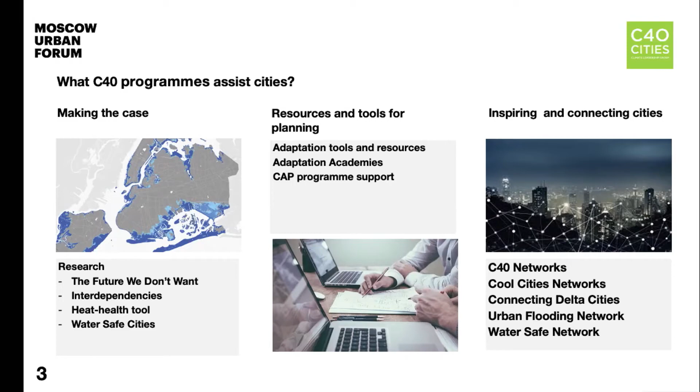We also looked not just at individual risks, but in our interdependencies report, we looked at how risks might combine, and cities would be facing interdependent cascading impacts from climate change. We produced recently a tool around how cities can avoid health impacts from extreme heat. And we're also looking at the impact of flooding and drought in terms of what are the social and economic costs. So all of these things provide cities with the data and the evidence that they need to understand and make the case for climate action.

We produced and developed a whole load of resources and tools for helping cities to plan adaptation action. So just to mention a couple of these, the heat health tool I've already talked about, and particular guidance we produced around monitoring, evaluating and reporting so that cities can understand the progress of adaptation and the impact that that's having. And we've also set up adaptation academies and a climate action planning program to provide support tailored to city needs on action planning, on implementing and mainstreaming, and on monitoring and evaluating.

And finally, one of the key things that we do at C40, it's sort of the beating heart of our organization, is connecting cities so that they can talk to each other, they can share problems, and they can share, importantly, solutions. So you can see here on the right a number of networks.

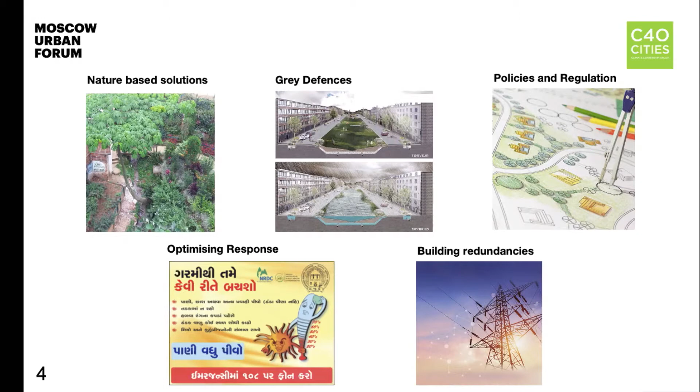So thinking about nature-based solutions, things like green space and tree planting, rain gardens and river restoration. And to give an example, Medellin's Green Corridor program is looking at designating areas across Medellin to increase green space and tree cover, reducing the temperature, providing shade, and reducing health risks from extreme heat.

In terms of grey defences, this is things like cool pavements, seawalls and floodgates. A great example is Copenhagen and their cloudburst street planning strategy, putting in a range of sustainable drainage systems across the city.

Thinking about policies and regulation, this is things like land use zoning and building codes. An example here from Cape Town of their coastal management lines, which have been introduced to prohibit or restrict the construction or maintenance of structures seaward of the line.

And thinking about optimizing responses, so building awareness through heat campaigns and warning systems, for example. We can look at the city of Paris that's designed and developed an interactive cooling center map, so citizens can locate emergency centers when they need to.

And finally, thinking about building in redundancy, so making sure that cities have backup supplies. And an example here is from New York. During Hurricane Sandy, their hospitals were operating on backup generators. So just making sure you've got the capacity to keep the city running.

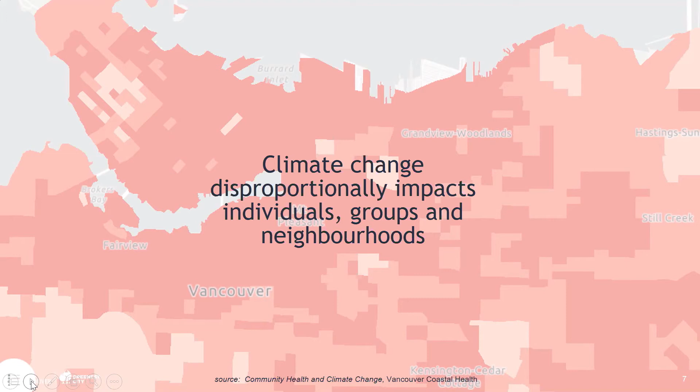And when those changes happen in our community, they disproportionately impact people and groups and particular neighborhoods. Largely, it's the disadvantaged neighborhoods. But it's impacting all neighborhoods, but differently in different neighborhoods, depending on the amount of trees that they might have and the other environmental conditions in those particular communities. So it's not the same across our city.

So in 2012, we adopted our adaptation strategy, and that mapped out hundreds of initiatives that we would undertake to be more prepared as a community. And in 2018, we updated that action plan. As you can see on the pillars of some of our bridges, we're indicating what the sea level rise will look like in our own city to educate our residents about that. So I'd like to tell you about our 2018 plan.

In terms of the hazards that we're planning for, poor air quality, I told you a moment ago, we were seeing that go up. Heat waves, more extreme heat in the summers. We're expecting increased coastal and urban flooding. And so we expect the sea level rise and extreme storms to impact the coast, but also then a lot of rain to come and impact the urban flooding as well. And then, of course, more extreme events.

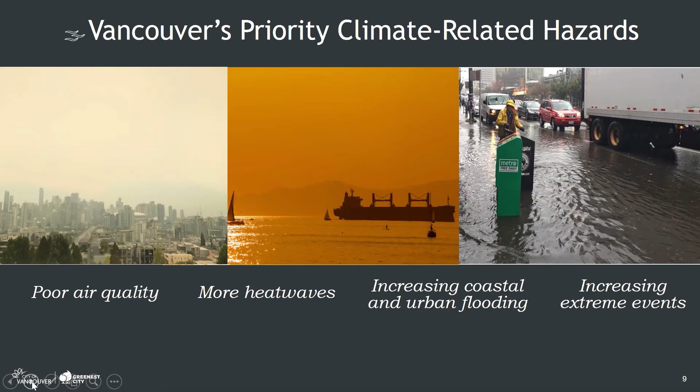As a city manager, there's lots of emergencies we have all of the time. We're always adapting to various things, but this is one of those that we see coming, and we need to be preparing for it. So our plan maps out our roadmap for doing that.

And then develop action plans and think about the co-benefits. How can we improve the quality of life, the health, the reduction of carbon emissions? And then number 5 is implement it. And then 6 is to monitor how we're doing in those actions. And then of course go about updating our plan like we did in 2018.

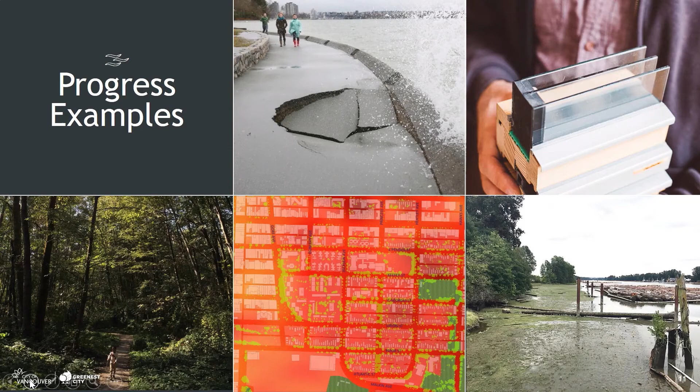Now, green infrastructure, you heard about Copenhagen has been doing great work on, and Rachel talked about other cities. This is just one example. If we have to rebuild a street, let's rebuild the street to adapt to climate change. Let's not just build the same street we've always been building. So this is an example of one project. It's a very small one, 1.2 kilometers.

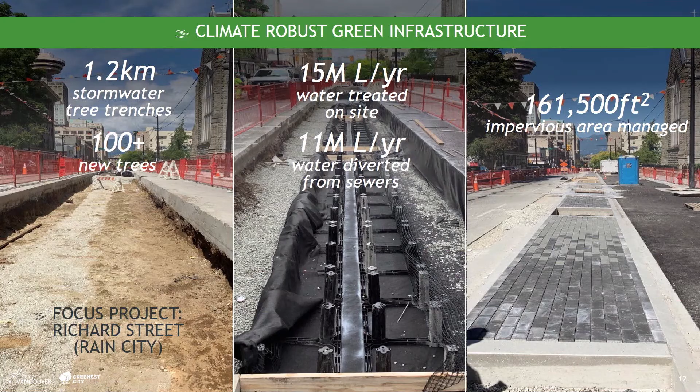Our buildings, of course, need to be adapted as well. Energy efficiency, like you heard about in Moscow, is a very, very important step. We're also looking at the rooftops. How can our rooftops absorb the stormwater and help to cool the city? So green roofs are a very, very important part of the strategy.

If you look around at the bird's eye view of any city, rooftops are very prevalent. So absorbing stormwater and keeping the city cool with green roofs is a very important opportunity for us. And of course, you can grow food up there as well, and you can create natural habitat.

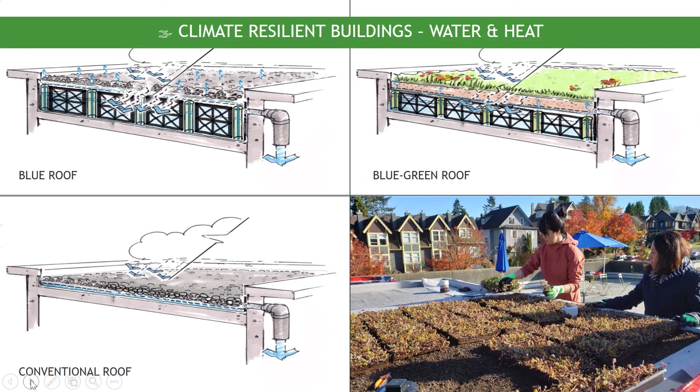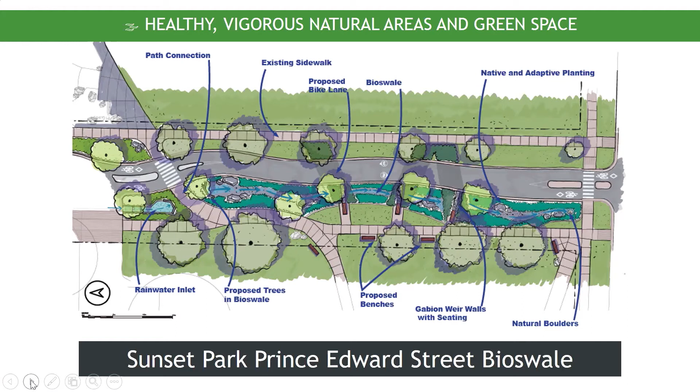So bioswales absorb the stormwater, create natural habitat. They also filter the rainwater, the runoff from the streets before it goes into the ocean. Now we're engaging our residents in this work as well. This is a citizen heat mapping process. The hottest day of the year, we give residents heat detecting equipment, and they ride around the city, and we can track and monitor heat across the entire city. So engaging our residents in this work is very, very important. They learn about it, they communicate with their neighbors.

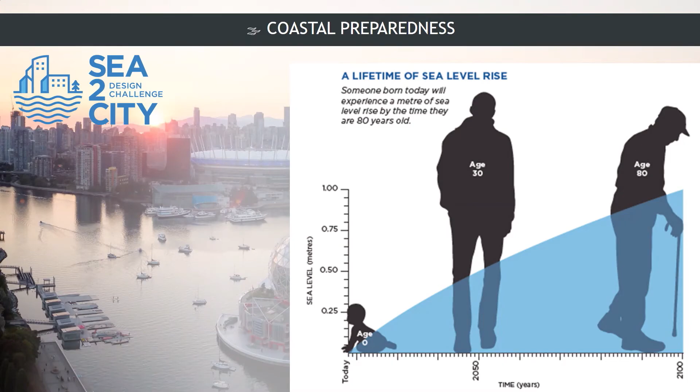Now, as I close out here, I've highlighted a number of the different areas, but what I'd like to say is that the layering of those together, thinking about the city holistically, taking an equity lens to understand how particularly low-income people are impacted, more vulnerable people are impacted, but thinking about this from a multi-hazard approach. How do these things layer together? How does one thing impact so many other things?

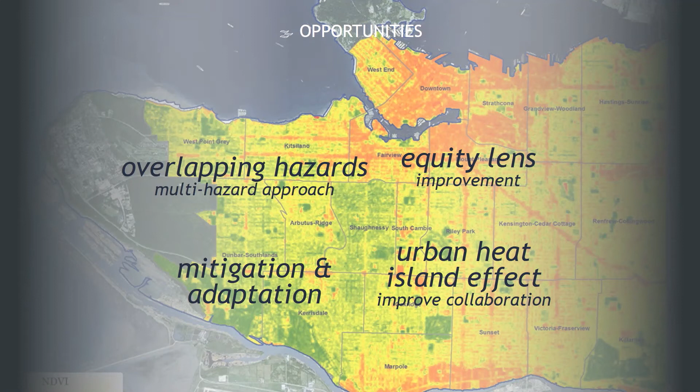How do we understand urban heat island effect? So the hottest parts of the city with those that are most vulnerable with where we plant trees. And in this map, you can see the areas with the trees are the coolest, the areas without the trees are the hottest, and those also happen to be the areas where we have the most low-income people. So understanding and mapping all of these layers is very important, not just looking at one thing at a time. So this work in our cities is absolutely critical.

We are members of C40, as I mentioned. If you don't know about it, look it up. There's incredible resources. We get to work with our peers across the world in making our cities even better.

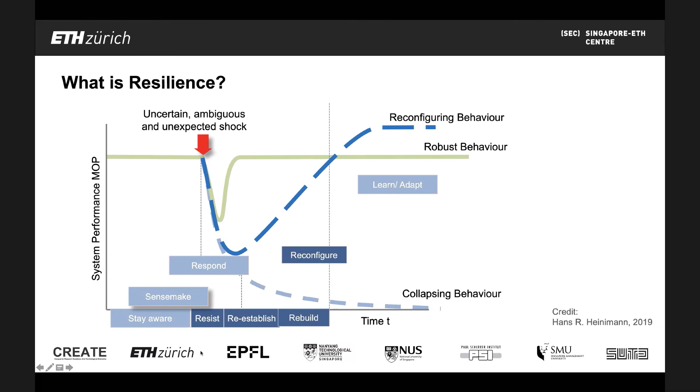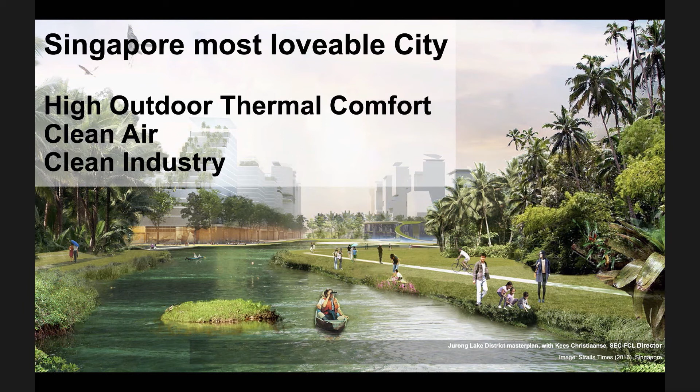We try to approach that from the scientific side, but also from the design side. So we make postulates, what we want to have or where we want to be in Singapore. We want to have high outdoor thermal comfort, clean air, clean industry, and less noise and renewable energy and circular economy. All these things do not exist to the degree that we need them to have in the future now. And then we study the scientific means how to do that.

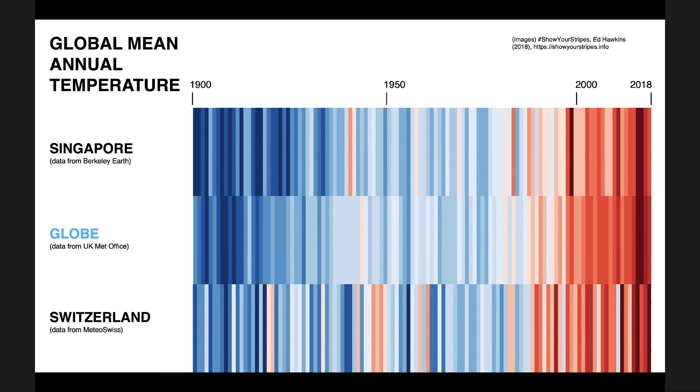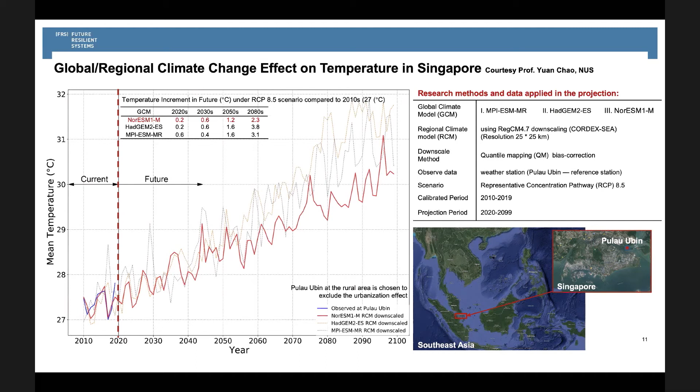Singapore is no better off than any other city in the world. You can see the global heat increase, of course, from left to right, and you can see Switzerland, and you can also see Singapore. Here we can see the temperature rising in Singapore. The average temperature we think in 2100 will be around 31, 32 degrees. It's already more than 27 degrees now. So everything that comes on top of it is very bad.

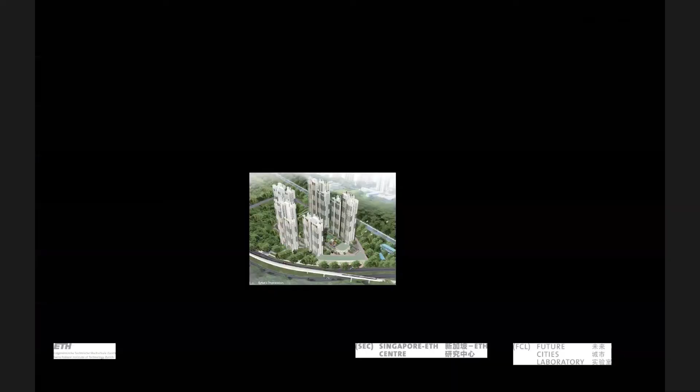In the past, let's say 100 years ago, we had these beautiful villas being built, but then the temperature was 3-4 degrees cooler, and you could absorb the heat and mitigate and adapt to the heat with architecture. Now architecture is doing almost the opposite, because they're building these large buildings, very dense, very high.

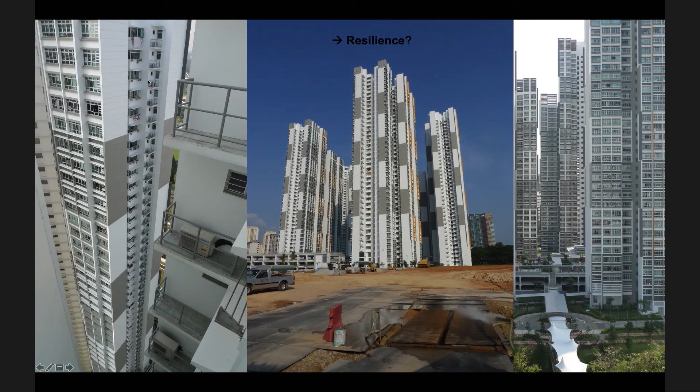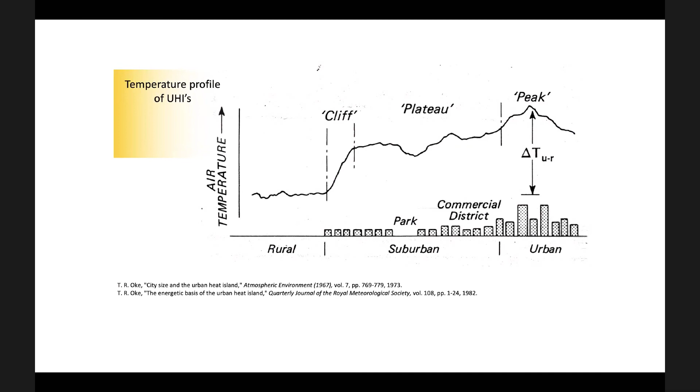But you can see on the high rises, like everywhere in the world, you have these individual cooling stations. These cooling stations produce hot air by sucking hot air out of the apartment, ejecting it to the outside. So at the top of these buildings, you have air temperatures of up to 60, 70 degrees, which is very inefficient and very bad for the environment altogether. That is, of course, one of the causes of the urban heat island effect from the rural to the urban with the peak, and that peak can be up to 7 degrees in Singapore.

With the Cooling Singapore initiative, we're trying to integrate and have a holistic approach to address this urban heat challenge. It's not only for Singapore, but for other cities around the world to increase their resilience. And we want to develop this particular program to be exportable to everybody and to use it. It's open source, of course.

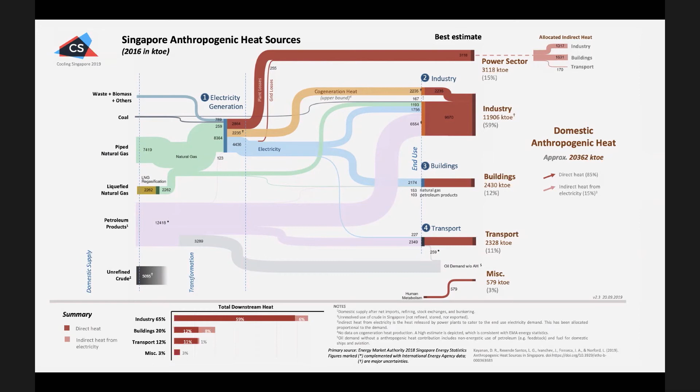Every city has its own DNA, as I said in the beginning. You can see that from the Sankey diagram of every city. Here in Singapore, for example, it's almost entirely fossil-based. On the left, the input, on the right, where it's used, you can see a very big part of it is used in industry, transport, and buildings, relatively little. This is completely different than in Switzerland, for example.

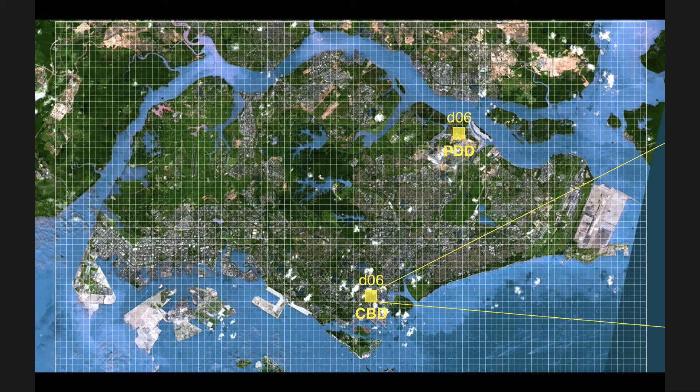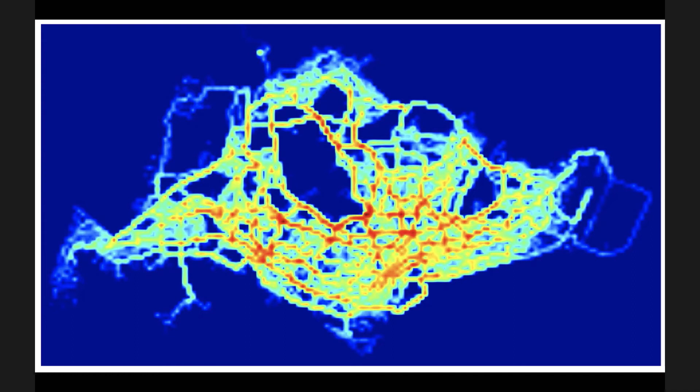In Singapore, we managed to make a 300 by 300 meter grid. So Singapore is quite small, 700 square kilometers. And in this grid, then we can insert the different heat sources. Here, the transportation at a certain time of the day, which can add 1 and 2 degrees of the total heat in the city in these areas. And more important, we do hour-by-hour simulations.

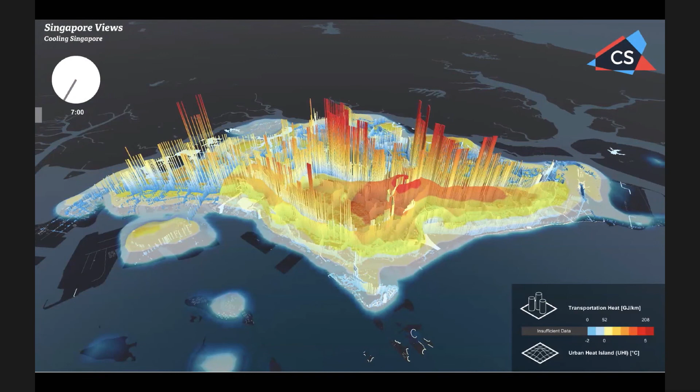Here you can see the urban heat island development during the day. This is 2 o'clock in the morning, 3 o'clock in the morning. You see the watch on the left. Now at 6 o'clock, the cars are driving to work, and you can see incredible heat ejection they have into the city. Then at 9 o'clock, 10 o'clock, 11 o'clock, some sea breezes are coming from the south, and it gets a bit cooler, but then 2, 3, 4 o'clock already it's heating up again.

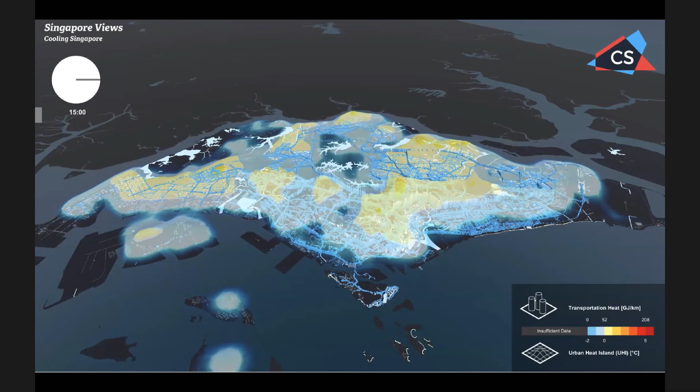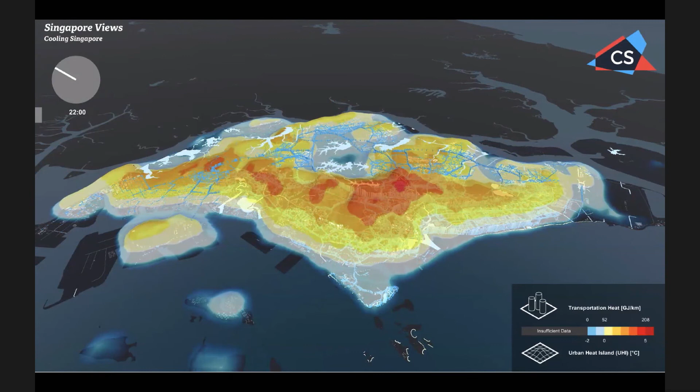And of course, then the cars are driving home again at 4 o'clock, 5 o'clock. And then the really ugly effect of the urban heat island starts to work, because the heat is rejected from the buildings, re-radiating into the cities, and exactly where people are living, it gets very uncomfortably hot. This is where they really are suffering.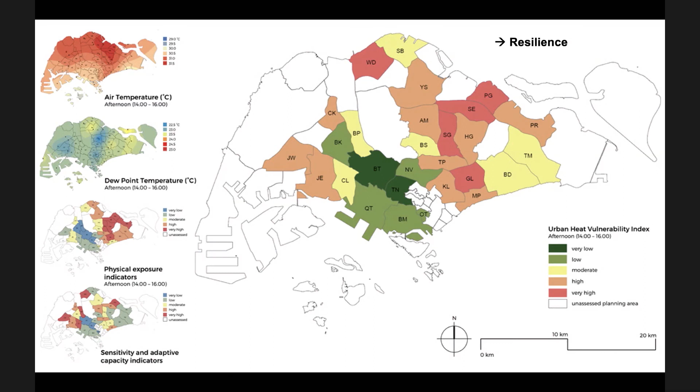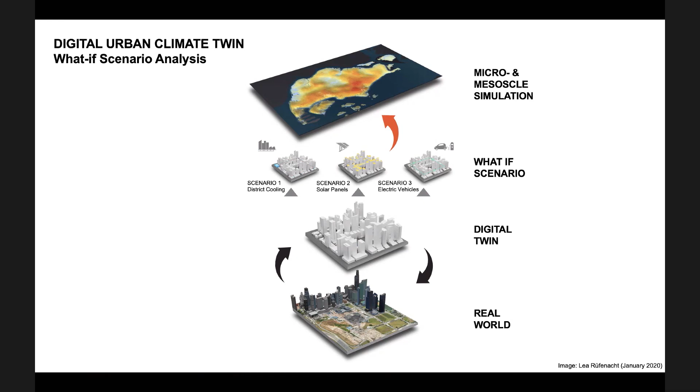The same is true for other cities with this heat island effect. That makes us make different vulnerability maps for the city, of course: where to live, where not to live, where to run, where not to run. And with this digital urban climate twin, we are now able to simulate almost any scenario for district cooling, for solar panels, for electric vehicles, and compare that directly to the measured temperatures and conditions that we have in reality.

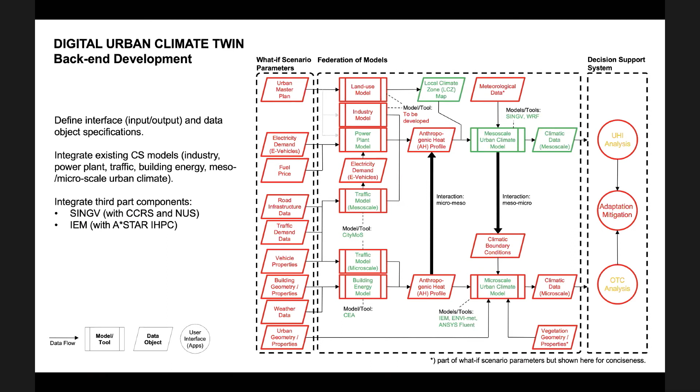This urban climate twin is very interactive. We want to make it a big interactive system, technically quite complex, but as I said, all open source, with some commercial programs integrated. Most of them, however, are open source. In the end, we want to give every city something like a big thermostat, and then the city government and the citizens can turn this thermostat, but they must know what happens and what they have to do.

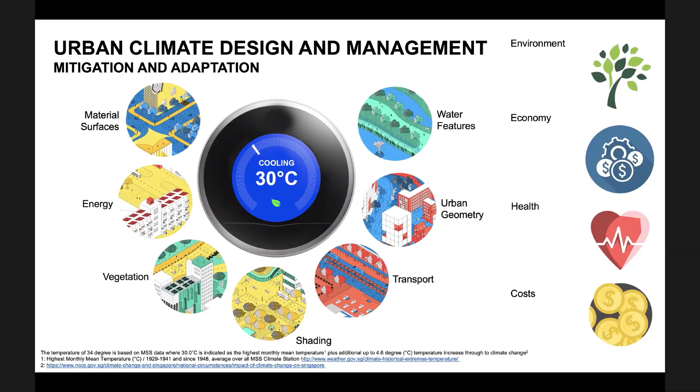They have to consider not only materials and surfaces; they have to use energy systems, different ones. They have to consider vegetation, shading, transport, urban geometry, water features. And then they can see, of course, the impact on the environment, the economy, the health, and the costs of the whole system. And this we want to export everywhere.

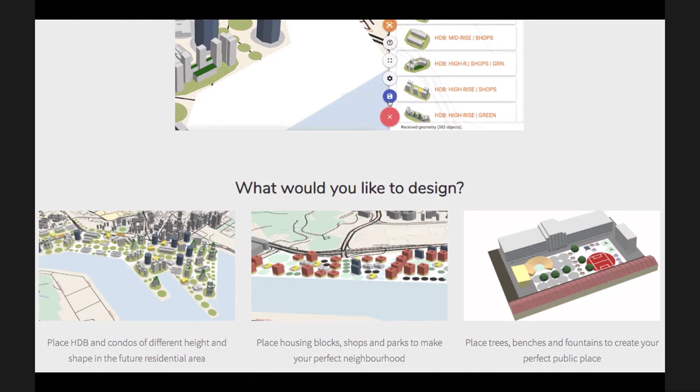And we can see that the citizens using these tools are doing an incredible job and are very, very sensitive and very, very good observers of the real situation. So rather than top down, we let people work from bottom up. The same we will do also in Zurich. We have already started. So it will be a worldwide digital urban climate twin that we want to share with all cities. Thank you very much.

Thank you very much, Gerhard. Thank you for your examples from Singapore and from Zurich. Now I'd like to pass the floor to Jan Gehl, architect, founder of Gehl Architects. Could you tell us, please, what solutions architects and developers use in the world to adapt to climate change and to reinforce the resilience of the cities?

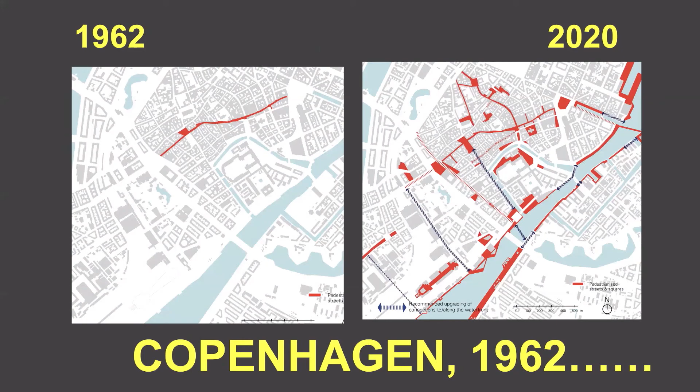If you think that this is the same story, they've just gone on and on for 50, 60 years, you'll realize that there are a number of phases in this, and I'll just go rapidly through these phases. The first 20 years, from 60 to 80 last century, was really to promote walking and promenading, to make sure that in the city you could walk without being hindered and without being run over or harassed by the traffic. So they made the pedestrian streets, widening the sidewalks, whatever.

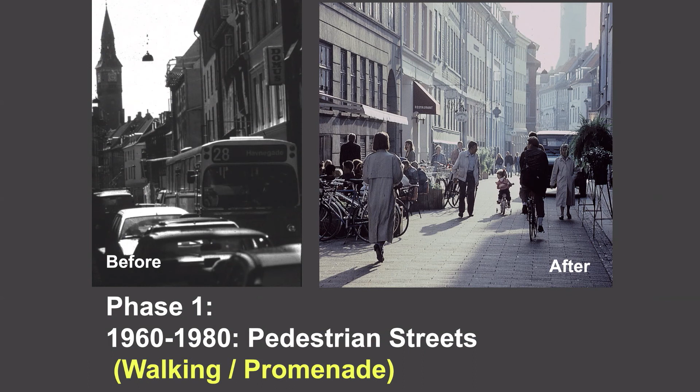But then came the next period, phase two, between 1980 and 2000, where we really started to take an interest in the fact that you should not walk all the time. People would like to sit down, to relax, to enjoy. We would also like to have culture enter the public spaces. It was also the time when people had a bit more money so they could afford to go to restaurants. We have this period as the period of the cappuccino culture coming in. It came all over Europe, all over the world actually, and it came also with tourism. Tourists don't walk all the time; they sit down. So sitting was the next phase.

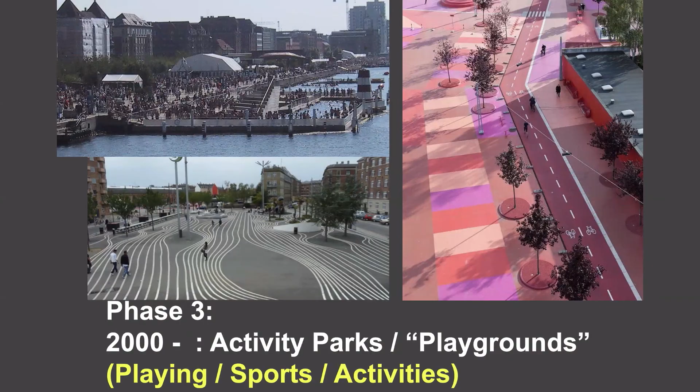The third phase has been after year 2000. More and more concern about the sitting syndrome, that people are sitting too much and they are not getting enough exercise, and they die of sitting, of sitting syndrome.

And the doctors say we shall move more and we shall have more fun. So you walk more, you should bicycle more, but also you could exercise more and have more fun. You could swim in the harbor, you could roller skate in the parks, you could bike on red bicycle lanes.

All these we've seen as a third wave, but now we are into the fourth wave of public spaces. That is the climate adaptation. And I think that what they are doing in Copenhagen at the moment, as a citizen, I find it interesting, because what they're doing, they are combining two things. They are adapting areas to climate, to extreme climate, but also at the same time, they're improving the neighborhoods enormously.

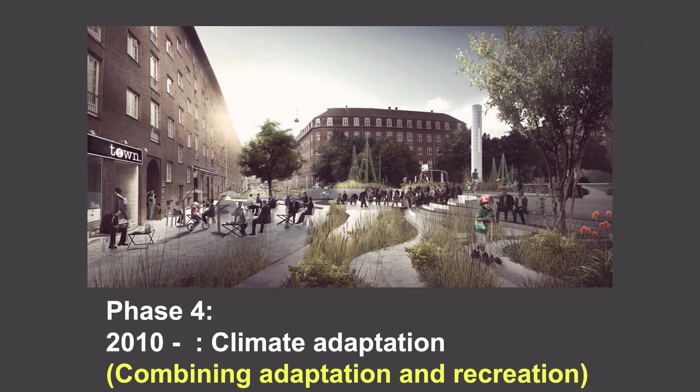So the main principle here is, which I think is important, always use your money two times or more. Don't go for climate adaptation only, go for more things, because you can improve the city vastly by using climate money for this. We have in Copenhagen seen more and more rainfall, cloudbursts, suddenly enormous much rain in the streets and running into the basements, very expensive.

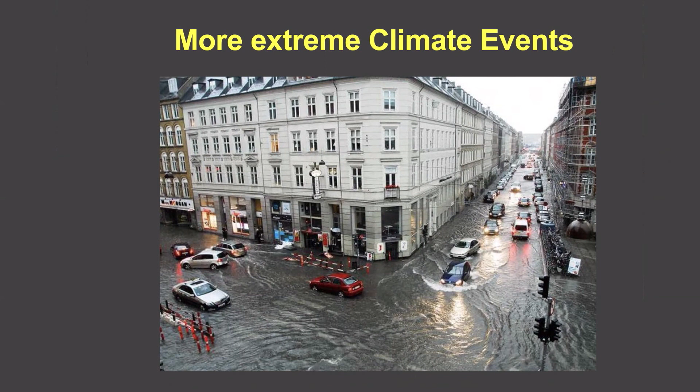And then they, of course, have started this program. They have a number of climate districts where they figure out where the natural runoff will be. And then they start to form the whole district as one big sponge, so that when the rain comes down, the rain will be absorbed and lead into the public spaces and the streets. And they do all the planting they can, so that there'll be as much absorbing as possible.

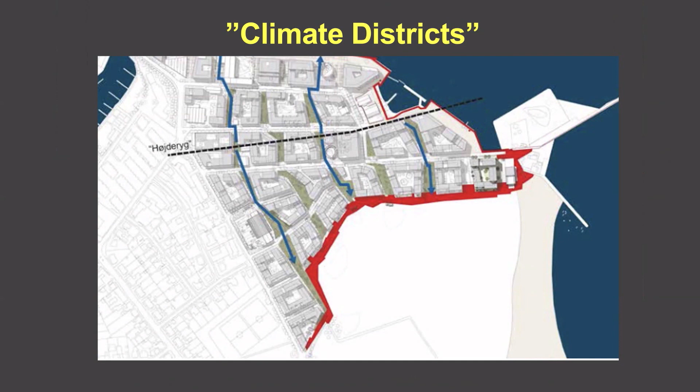They make green roofs, and then on the squares, they make wetlands. And that means that when there is a big cloudburst, all the water will assemble here, and this green area will become a wet area, will become a lake. But the trick is, when it's not full of water, it's a fantastic recreational landscape for the whole area.

So the area gets generally cooler, the air gets cleaner by all the planting, and the water doesn't run into the ocean. It runs into these special reservoirs where it can be transferred into the groundwater and be turned into drinking water. It's absolutely waste to take rainwater directly into the ocean, because we need the water for a number of other things.

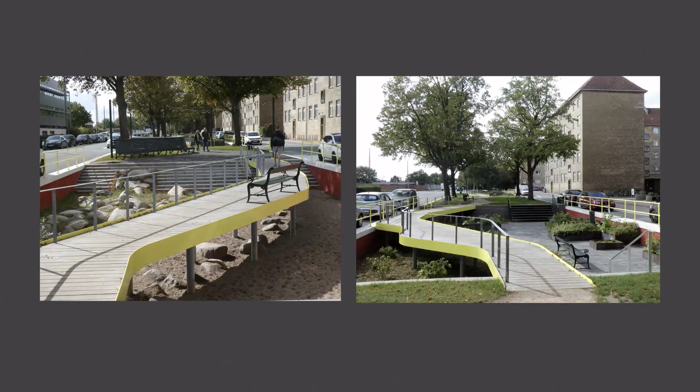So this principle of using the money two times, both for recreation and having some fun, and also for absorbing the extra rain, is used in these areas. And I think that's a great idea, because in this way you can improve the city considerably, and at the same time you can also prepare for some situations which could give you quite many disastrous hours.

So the main principle here is use your money two times or more. In this case, they use it for climate adaptation, for greening the city, and for creating more place for recreation and for playgrounds. There's something here for everyone. And never forget that wet children are happy children. And in these climate districts, there will be more wet children than in the rest of Copenhagen.